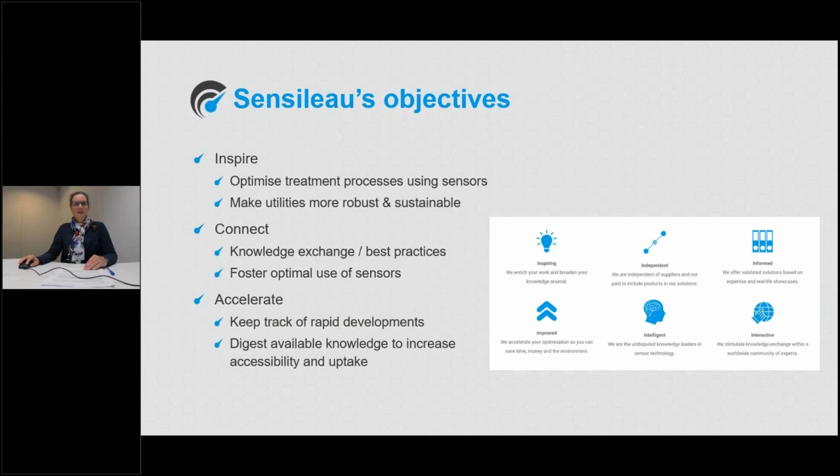We connect water experts from all over the globe to exchange knowledge and develop the best practices in order to foster the use of sensor technologies in the water industry. We keep track of the many rapid developments in the digital transformation of the water industry and thus accelerate the uptake of innovative technologies and monitoring strategies by collecting all available knowledge on this subject and converting it into accessible, readily available information. And there is a lot to digest.

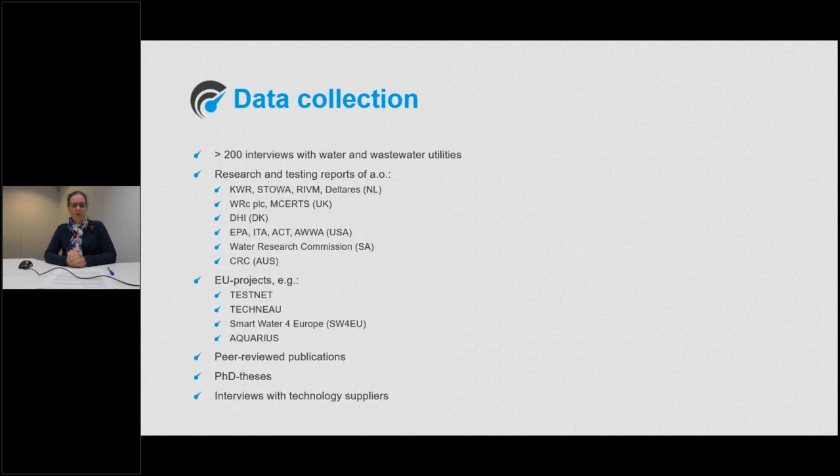So far, we have conducted over 200 interviews with water and wastewater utilities to ask them about their experience with sensor technologies in the field. We've worked our way through hundreds of research and testing reports and keep track of the latest research and developments through grant programs, peer-reviewed publications, and PhD theses. In addition, we regularly conduct interviews with technology suppliers to find out about new technologies entering the market.

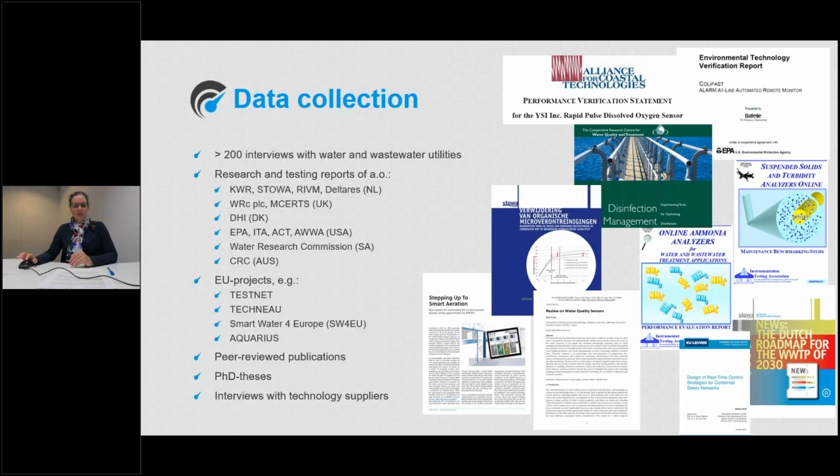Next, we convert all this information into various products, such as our sensor database, webinars, podcasts, workshops, calculation tools, and soon also e-learning modules. All our products have one thing in common. They are designed to provide you with the best possible information in as little time as possible, only a few clicks away. And today we discuss our Wat-IF calculation tool.

This tool aims to translate the results of pilot tests to individual wastewater treatment plants. Results obtained at one treatment plant are not always easily converted to another, as the successful implementation of monitoring and treatment technologies is often dependent on the local conditions and the layout of the plant. Wat-IF helps to determine the potential gains and benefits when implementing the pilot technology at your own wastewater treatment plant. The outcomes of the tool support the development of a business case for the implementation of innovative treatment technologies and new monitoring concepts based on the latest available knowledge and insights.

Wastewater treatment plants are increasingly required to address the removal of various types of micropollutants, such as pharmaceuticals and pesticides, to improve the quality of the receiving waters and to increase the possibilities for water reuse. However, implementing additional treatment steps to this end requires considerable investments and often increases operational costs, not least because of an increased energy consumption.

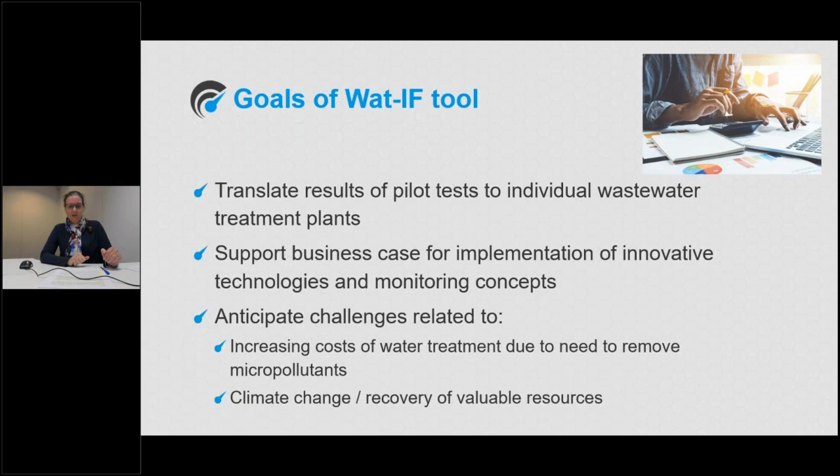With water rates already under significant strain and increasing pressure from society to reduce the overall carbon footprint of the water sector to help combat climate change, water utilities have little space to maneuver and need to be creative in order to meet all demands. The Wat-IF tool aims to support water managers facing these challenges. So, without further ado, I suggest we move on quickly to the first part of Roozbeh's presentation on the development of the Wat-IF tool.

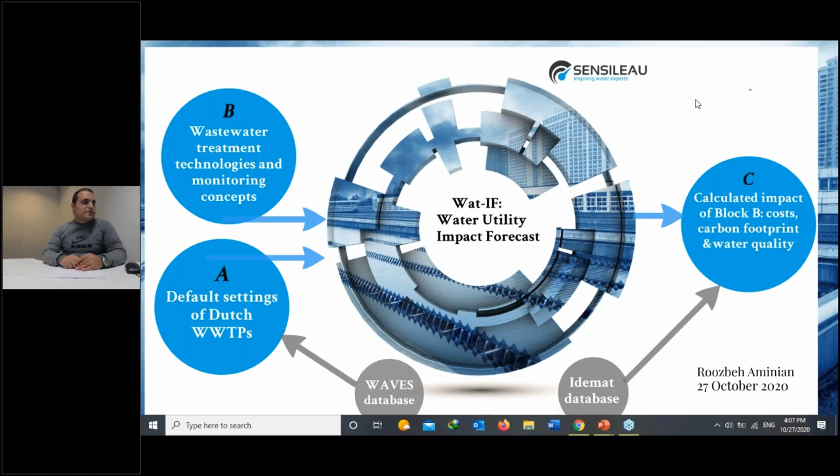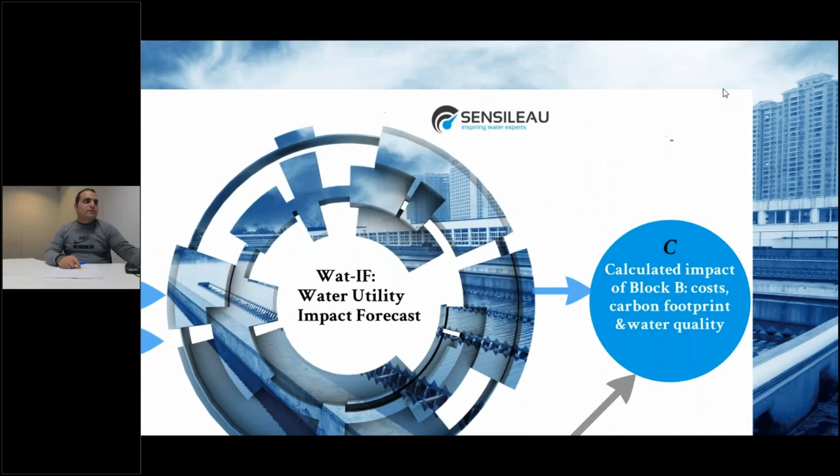I have a Master of Science in Chemical Engineering, Separation Processes. I'm a Master student in Water Management at University of Twente in the Netherlands. Currently, I'm researching at Sensileau. I'm working on my master thesis. I'm trying to combine my engineering and management knowledge by developing a decision support tool, in cooperation with Dr. Corinne Carpentier.

Wat-IF, Water Utility Impact Forecast, a decision support tool for water managers at wastewater treatment plants. This tool is going to help water managers at wastewater treatment plants in making a decision to implement new technologies and monitoring concepts by considering costs, carbon footprint, and water quality.

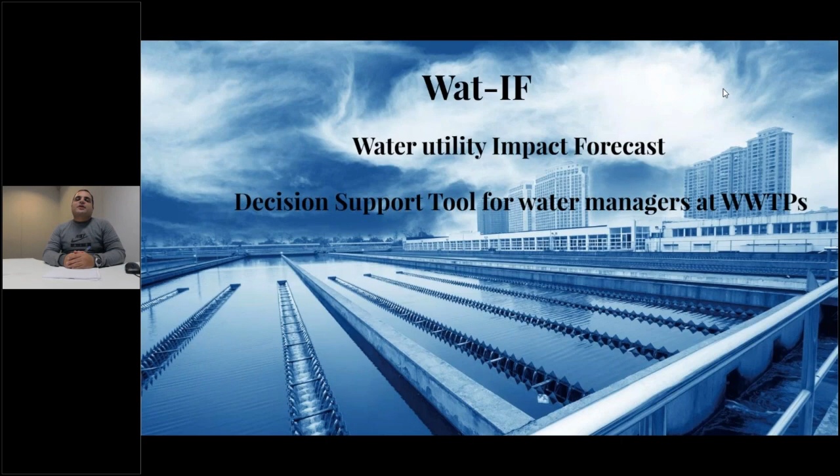As you can see in the overview of our model, Wat-IF is comprised of 3 main blocks and 2 databases. Block A is about the default settings of wastewater treatment plants. Of course, it's for Dutch wastewater treatment plants because we are working on wastewater treatment plants in the Netherlands. However, it can be easily converted into a version for any other country. And also the WAVES database, which was used to build the default setting for wastewater treatment plants in the Netherlands. We use the realistic data and information of the WAVES database.

The second block, block B, is wastewater treatment technologies and monitoring concepts. Those are the input block for our Wat-IF model. And block C is about the calculated impact of implemented technologies and monitoring concepts in terms of costs, carbon footprints, and water quality. And it's very important to note that this block uses the Idemat database in order to calculate the carbon footprint of implemented technologies and monitoring concepts.

Firstly, I'm going to start with the first block, block A, default settings of Dutch wastewater treatment plants. First of all, why default settings? In order to run the model, we need the exact information on the wastewater treatment plant. However, it is not always possible to use exact information for wastewater treatment plants, so we can use our default settings in order to run the model.

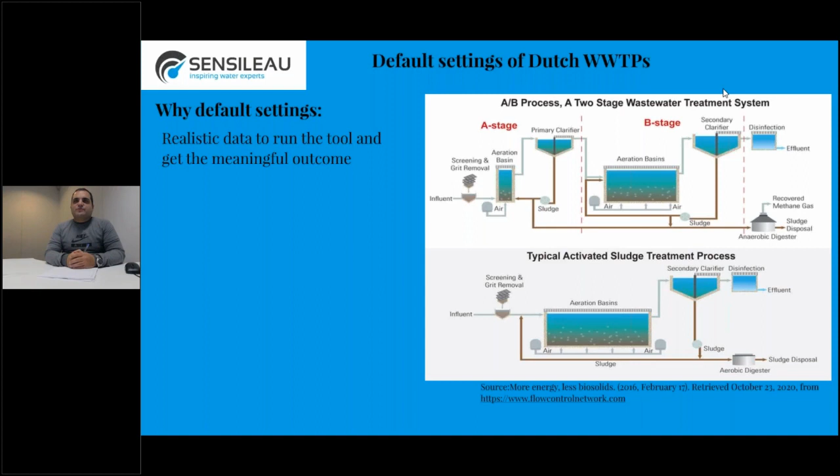But it is very important to note that realistic data need to be entered into the model to run the model and get a meaningful outcome. That's why we used realistic information and data of the WAVES database, which I'm going to elaborate on, to build the default settings.

But what are default settings? Default settings were built based on the main characteristics of wastewater treatment plants, the characteristics which define wastewater treatment processes, and which are going to be changed by the implementation of new technologies and monitoring concepts. Those characteristics are water quality parameters, size, wastewater treatment steps, and also energy consumption and costs associated with size and wastewater treatment step.

We considered nitrogen, phosphorus, COD, and BOD as parameters in terms of water quality. There is a wide range of micropollutants to be considered, but it's very difficult to measure all individual parameters in terms of micropollutants. And I would say nitrogen and phosphorus are very important because of eutrophication and their toxic effects on the ecosystem.

And COD and BOD are highly important because they are used to design the kinetic biological processes and also simulate the wastewater treatment processes. For example, BOD is used to determine the size of a trickling filter, and it is also used to determine the size of an activated sludge unit.

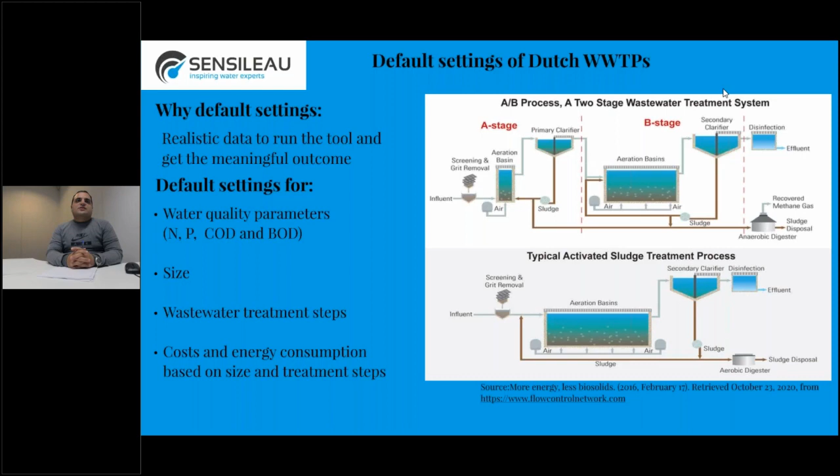So these are the default settings of Dutch wastewater treatment plants, which can be used to run the model if we don't have exact information on wastewater treatment plants.

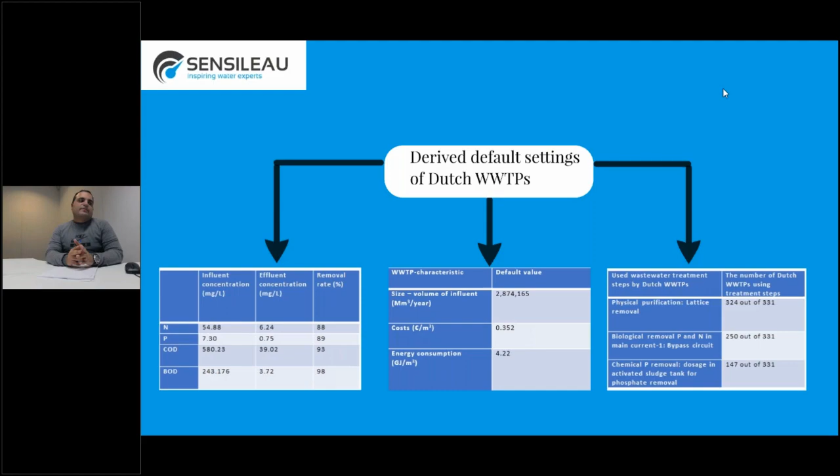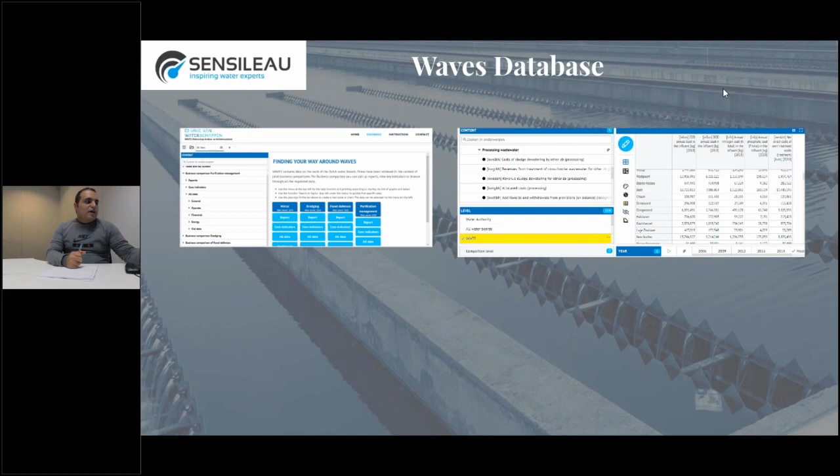But these default settings have been built based on the WAVES database. The WAVES database is a huge database containing different kinds of information and data. As you can see on the left side of the picture, different data: operational information, financial, energy, in terms of purification management, flood defenses, dredging, and etc.

Fortunately, this information is available for each wastewater treatment plant in the Netherlands. As you can see on the right side of the picture, COD, BOD, effluent, nitrogen, phosphorus, costs, energy consumption per cubic meter, everything regarding wastewater treatment plants is available, which can be used for building default settings for wastewater treatment plants.

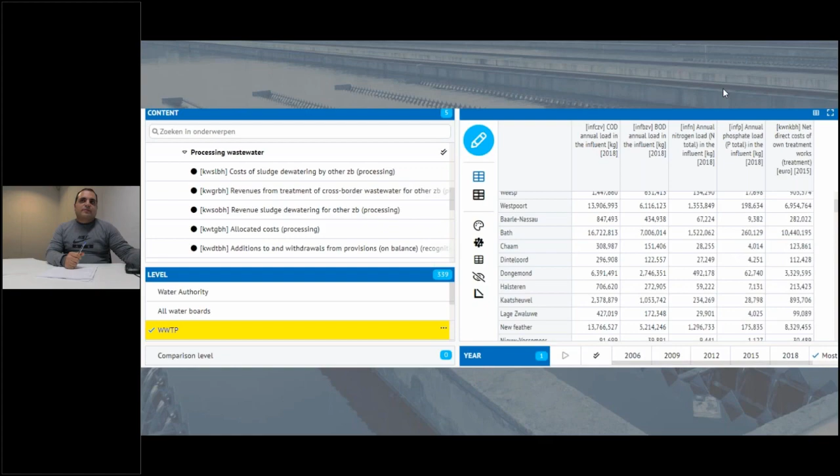I talked about the first block, which was the default setting and also the WAVES database, which was used to determine the default setting of wastewater treatment plants in the Netherlands. The second block is wastewater treatment technologies and monitoring concept. There are a lot of treatment technologies and monitoring concepts, but STOWA, which is a research institute in the Netherlands, is quite well known.

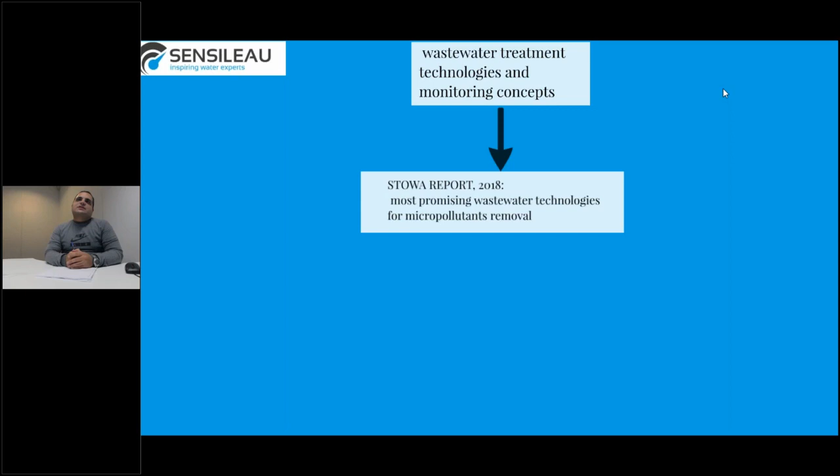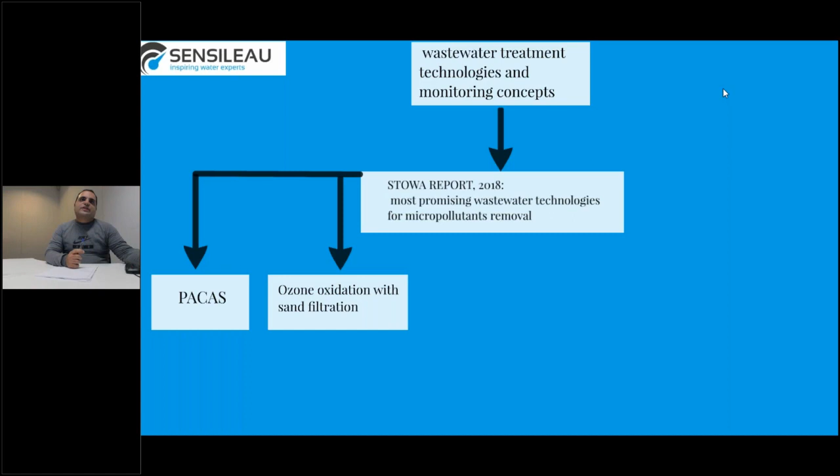They have been trying to develop and implement the best treatment technologies and monitoring concept, specifically in terms of micropollutant removal. They have been carrying out a lot of research. They came to a conclusion in the report of 2018. The most promising wastewater technologies for micropollutant removal are PACAS, powdered activated carbon and activated sludge, ozone oxidation with sand filtration, GAC, granular activated carbon, and UV hydrogen peroxide oxidation.

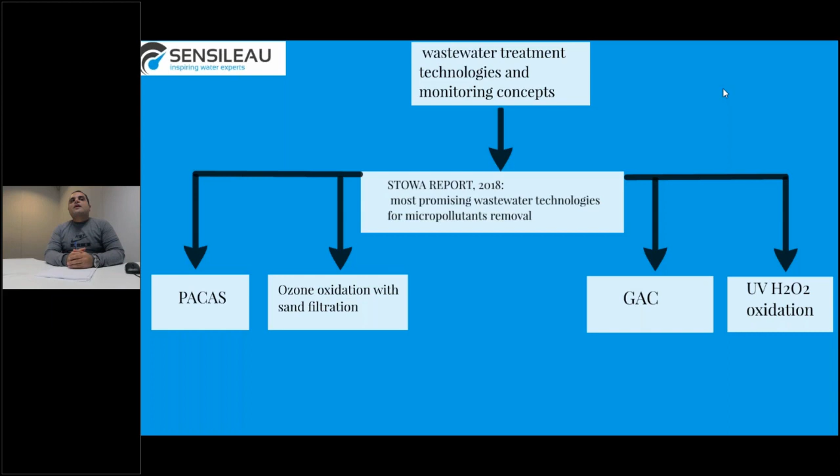We analyzed those technologies, we studied them. We conducted interviews with the experts involved in the implementation of these technologies at Dutch wastewater treatment plants. We came to the conclusion the best technology out of 4 technologies is PACAS. Powdered activated carbon goes into the activated sludge system. Actually, PAC is directly dosed into the aeration tank. Consequently, this is the combination of biodegradation and adsorption. Therefore, the removal efficiency of micropollutants is going to be increased considerably.

The energy consumption of this technology was 150 gigajoule per year, which is quite low in comparison with the other technologies. The carbon footprint of PACAS was 116 grams CO2 per cubic meter, which is quite high in comparison with the other technologies. The reason is PAC is considered a fossil product. That's why it's quite high. But I would say there are some developments in order to replace PAC with renewable materials to reduce the carbon footprint. If it happens, the carbon footprint of this technology is going to be decreased.

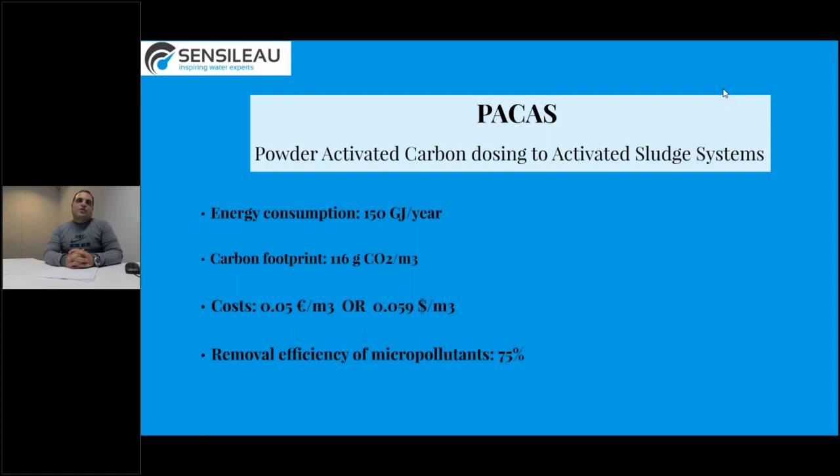And the cost of the implementation of this technology was 0.05 euro per cubic meter and $0.059 per cubic meter, which is quite reasonable in comparison with those technologies. And the removal efficiency of micropollutants by PACAS, first of all, is 60% when they use 10 milligram per liter PAC dosage, but when they increased the carbon dosage to 25 milligram per liter, they observed the removal efficiency increased to 75%, which is quite promising for this technology.

But in terms of monitoring concept, so far one of the best monitoring concepts is APC, Advanced Process Control, which is going to stabilize the treatment process, and is going to reduce energy consumption and costs. At the moment, I would like to invite Dr. Leo Carswell to elaborate on advanced process control.

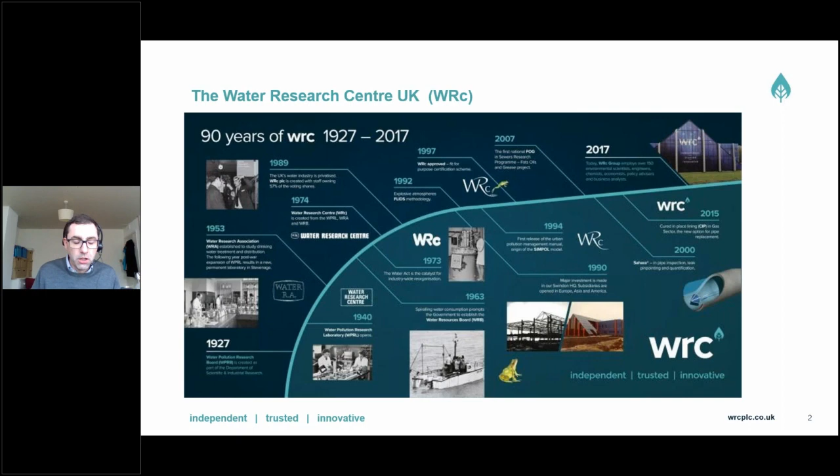So I work for an organisation called the Water Research Centre in the UK, WRC. I don't want to say very much about this organisation, but it has a very long history, and we've been working with the water sector for many years, well over 90 years. And sensors and instrumentation is my background, but a lot of work in recent years on process control and wastewater process control and the use of sensors. So I'm going to talk about some of the experience that I have through UK projects.

So maybe a good place to start is really talking about what advanced process control, or APC, really is. In terms of a term, it's really just a broad term for the use of technologies and techniques for optimizing a process or a control system. So really moving beyond a very basic control system to a more advanced system. And in terms of the concept we're talking about here today, we're talking about wastewater treatment. So I'm going to focus in on the activated sludge process, which is the process which has had most APC applied. Really, this is the main part of the treatment process, the most energy intensive part of the treatment process, where APC is often used.

And APC is used in that part of the process to control the dissolved oxygen level, the amount of aeration. So optimize the aeration to perform the treatment process as best as possible. So where you may previously have had a set point, maybe a 2 milligram, 1.5 milligram per litre dissolved oxygen set point, rather than just have a simple feedback control loop set at a single point, advanced process control allows you to do an awful lot more, and as was said earlier, optimize your process a lot better.

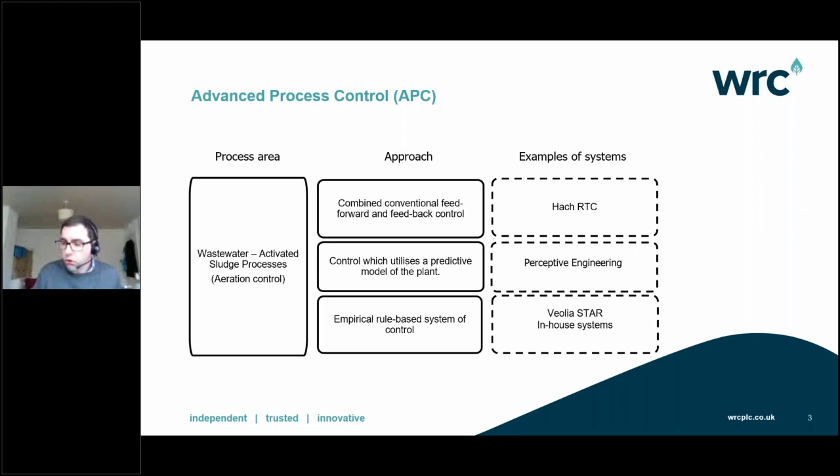The second one is a predictive model. So this is a learning predictive type model, what you might term a black box type approach. And I'll talk a bit about Perceptive Engineering. They're a UK company who have developed this technology for a wastewater treatment based approach, and there's several systems that use that type of approach. So I will talk about some of those examples in a bit, but first of all, I wanted to cover how advanced process control is used, because there are some clear distinctions, and I know about how it's used in the UK, so I'll talk a little bit about that.

But as was said earlier, it's all about reducing variability and getting better control of your process. And obviously, in the wastewater treatment process, you can't control what comes into your treatment plants, so you have a variable product. So getting any more control on it is an important aspect. In the UK, the current use is much about saving energy, saving carbon, saving cost, with managing the risk of variability as part of that. And it's about maintaining the effluent quality. So that's how it's used at the minute. It's very much about saving energy. So that's the red boxes at the top.

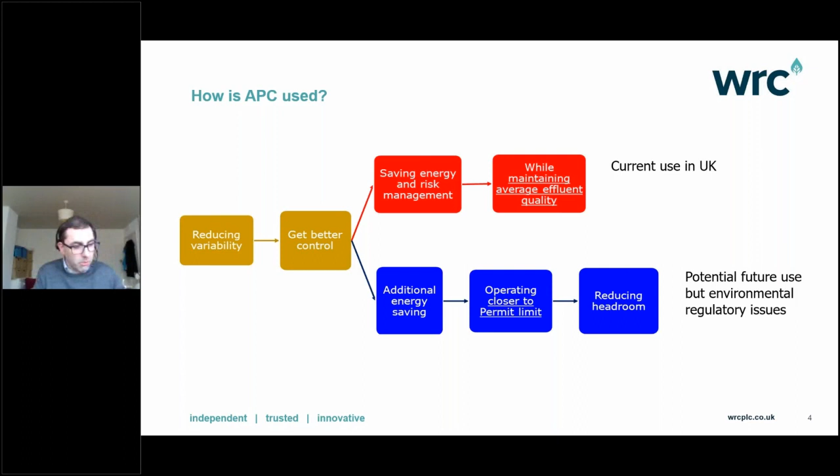The blue boxes at the bottom are the potential ways that you could use APC, but it's not used this way at the moment, at least not in the UK. So that's about additional energy savings through optimizing your process so that you can work much closer to your environmental permit limits. So essentially reduce any safety margin or headroom that you might have in the process. And that's not actually done at the minute, and there's several reasons for that, and I'll mention them a little bit later. So energy savings is really the driver for a lot of activated sludge control, and that's because aeration is an expensive process. The aerators, there's a lot of money, electricity spent producing that aeration. So this is the primary reason why people are doing activated sludge process control.

And I'll talk a bit about what the reality is in the field in terms of what people have been able to achieve. But they're the sorts of savings that you might expect. Although, as was said earlier, and really a lot of the whole point of today's talk is that each site is different. So really, it's very site specific, and it depends on the conditions and the site that you're dealing with. So that's a bit about energy saving.

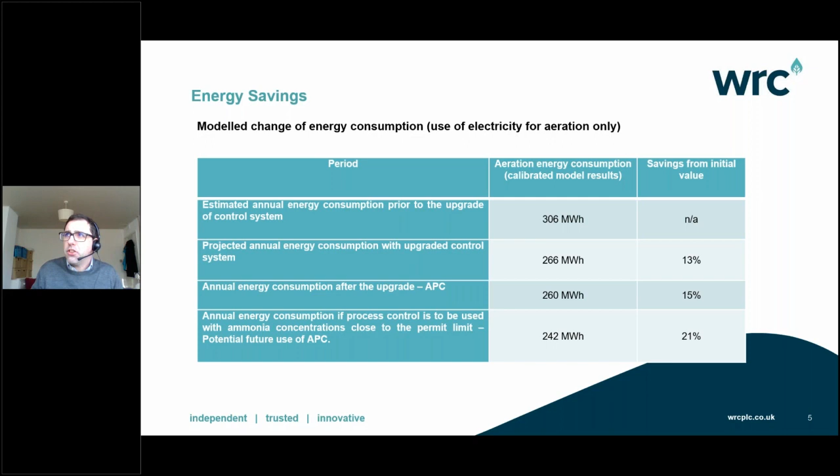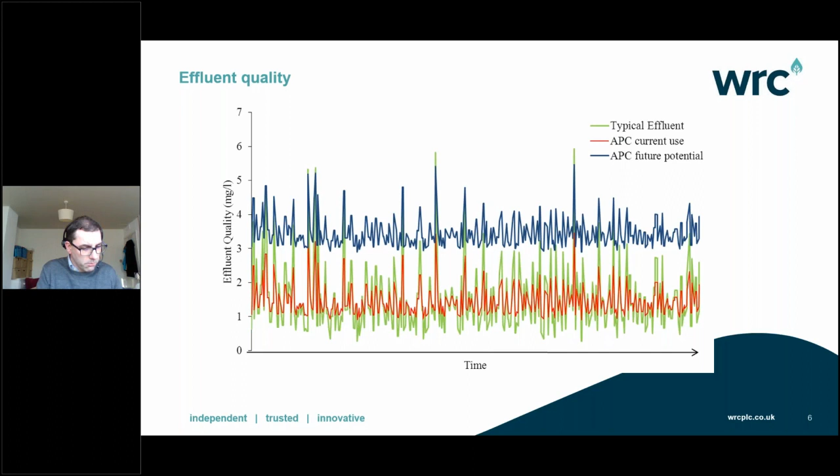You can look at this in a different way. You can look at this in terms of the distribution of the effluent quality from that plant, and this is where it becomes a bit more interesting. So the typical distribution of effluent quality from an activated sludge plant or wastewater treatment plants will have a long tail. So you'll have very few high concentration events. Your highest probabilities will be towards the low concentration. And that's the green plot.

The red plot shows the activated sludge advanced process control process, really tightening that distribution, controlling that distribution. So it's very tight around the mean, and the process is very well controlled. The future potential, the blue graph, is really just moving that to the right and saying you could operate your plant and discharge more material to the environment, save energy, save carbon.

But the reason that people aren't doing that, at least in the UK, is because that would mean more polluting load into the receiving waters. So the environmental regulator would probably say, sure, you're saving carbon through less energy, but you are polluting the receiving water more on an annual basis. So there's a balance between the

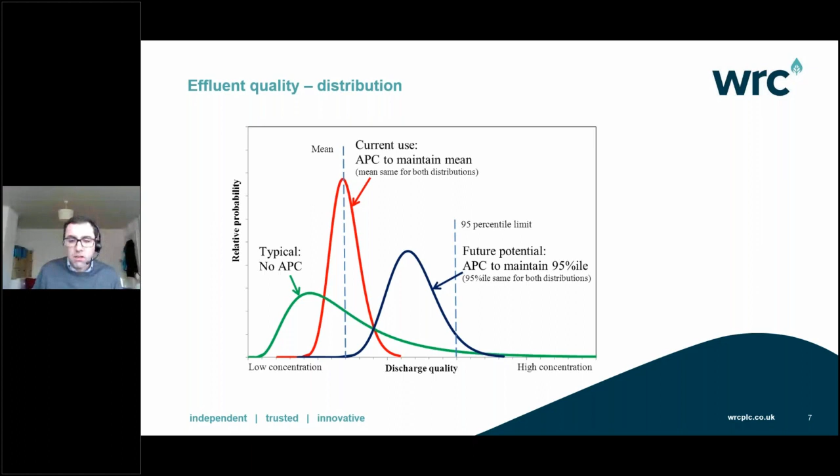about some of the different technologies. This is my area of interest a little bit more, and I'm not going to go into any detail specifically for activated sludge plants. So HACH are very well known for making sensors and instrumentation. They've added to that technology a process control system, which, as I said before, is based on this International Water Association pollution research and control model.

So an established model that's built into their algorithms, and it's based on feed forward and feedback control using DO, ammonia, nitrates, organic loads type sensors. So it's very well characterized. They've demonstrated quite significant savings. I think some of the literature talks about up to 30% savings over a range of different applications.

And at least in the UK, I think some of the largest wastewater activated sludge plants in the UK are running this system. So it's well used and well known and well characterized. The photographs are actually just HACH dissolved oxygen sensors. That is not actually the control system, but I'm not sure you can actually tell, because the control bit is essentially just software and electronics.

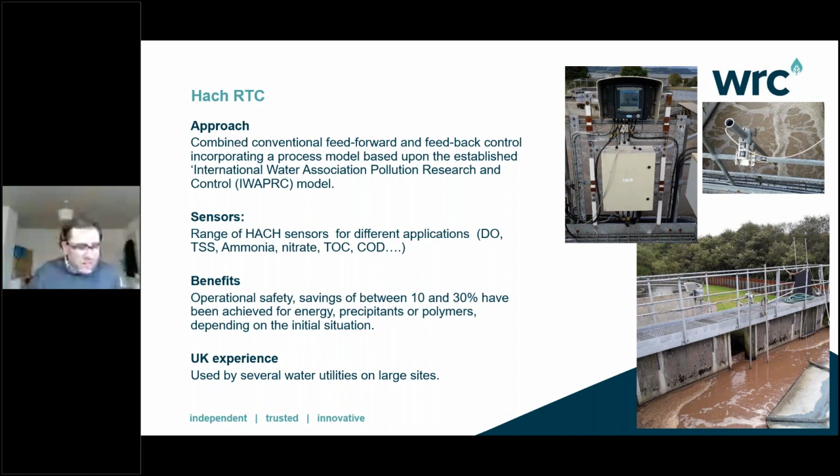The next system is a little bit different. So this is by a company called Perceptive Engineering. Perceptive Engineering are not a sensor manufacturer. They're actually a company based in the north of England, and the background is all about statistical process control, model predictive control, data visualization. And they've done a lot of work on manufacturing environments where you optimize the process.

Maybe this is a bit different, where you have a known product coming in and you want to produce a known product going out. Wastewater treatment is a little bit different, but they've been applying some of their technologies, and their technologies are all around using a predictive model. So it measures what's happening on the site, the inputs, and measures the outputs, and it learns over time the relationship between the inputs and the outputs.

So it's quite good when you've got a variable input and you might have different events, storm events, when equipment breaks, etc. So this has been used on several sites. Some really good benefits achieved. In the UK, it's been accepted and used by several utilities.

It is seen as this black box technology, so you don't really know what's happening inside the algorithm, inside the computer system that's operating it. So unlike the other processes where you can delve down into the algorithms and relate them to the fundamental wastewater treatment process, this is very much looking at a predictive model based on learning and relationships. So it's a little bit different, and that's seen as a challenge for some companies who want to know what's happening. The third approach is based on more empirical rule-based sort of systems.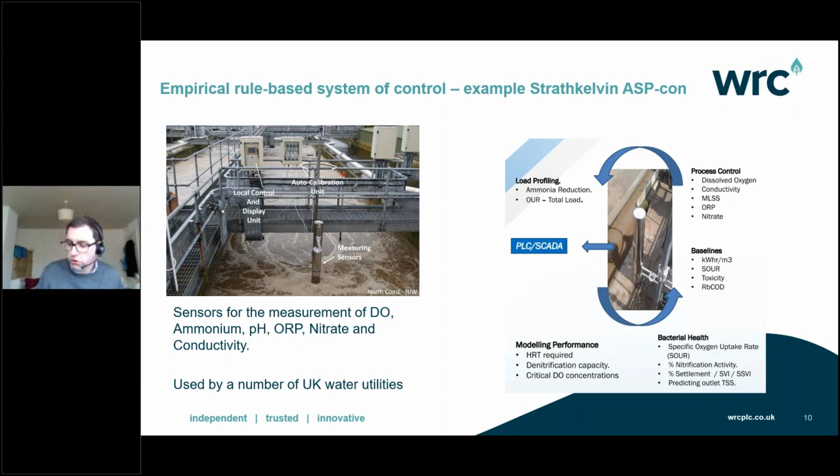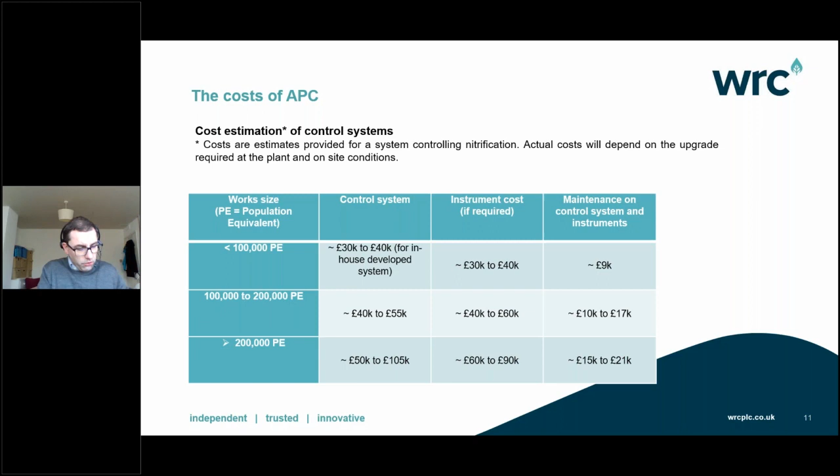So maintenance is required to keep the technology operating. We're talking about putting sensors into a really dirty environment, so keeping them clean is important. That's good. And then my final slide, I just really wanted to touch a little bit on some of the UK experience.

I think I said at the beginning, the use of APC has really been driven in the UK, at least, by energy and optimization teams with targets within the water utilities to reduce their energy consumption and their carbon use as well. So it's been driven by them rather than for compliance or discharge or permitting reasons. That's what the drive has really been, and that's been over the last 10 or so years.

There have been some really significant benefits achieved as a result of this technology. One of the messages you hear from the water utilities in the UK is that they often achieve the benefits within the first year or two years, and they had very good benefits. The challenge was to maintain those savings, so trying to get the system optimized over the long period can be a challenge because of the maintenance required and because the technology needs to be continually looked after. It's not a fit and forget technology.

These systems require accurate sensor measurements to be able to perform long term. I think all of the UK water companies have got these systems in place, and they will all invest in them more, and we'll see them being used at more sites, probably more smaller sites as well, because they tend to be focused on the largest sites at the moment. But we will see more on conventional activated sludge plants. We'll see more involved in things like P removal and sludge management as well. That will definitely happen over the next 5 or so years.

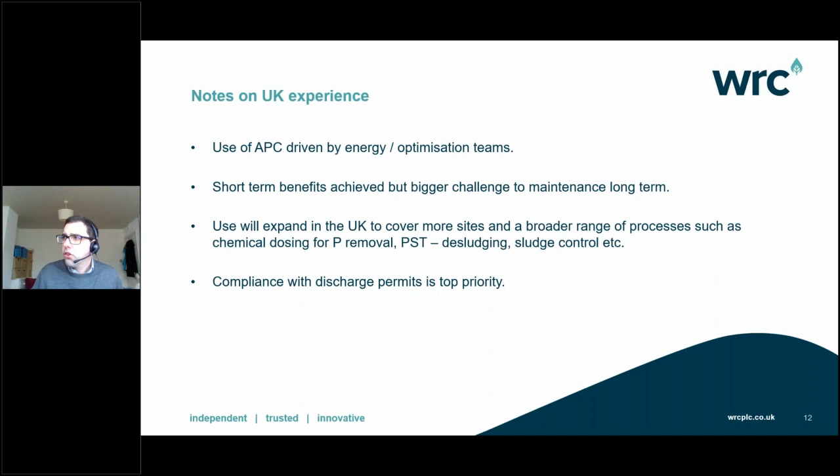So that's me. That was a very quick look at some advanced process control. There's obviously a lot more you can say about this, and I think a lot more that will be said about this within the project that's being presented, or the work being presented today. But hopefully that was a useful introduction and sets the scene a little bit to help the later presentation. I'm very happy to answer any questions if we have enough time.

At the moment we're done with block A and block B, the input and WAVES database, which are inputs for our model. So now I'm going to concentrate on block C, which is the outcome of the calculation of the Wat-IF model.

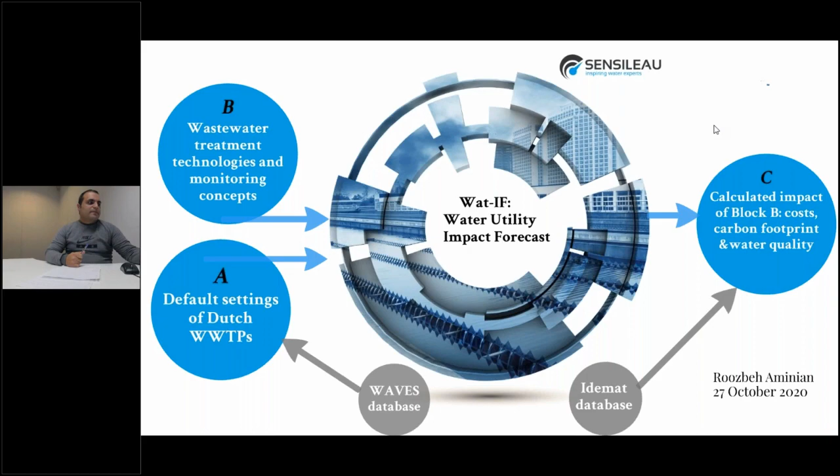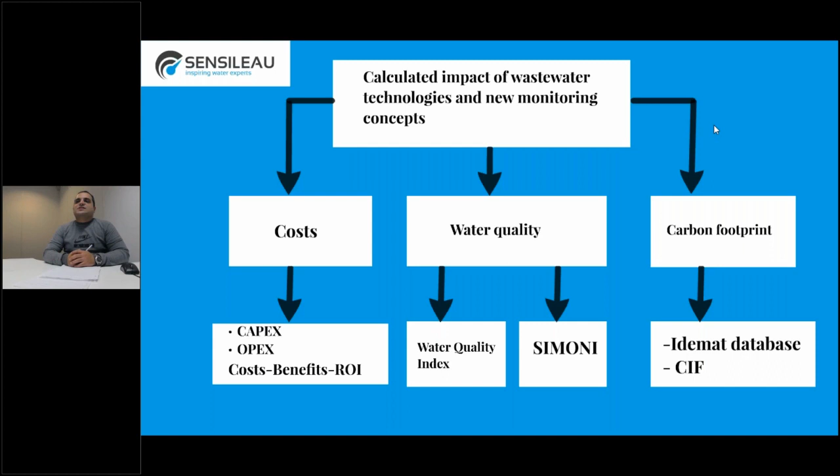Wat-IF is going to calculate the impact of wastewater treatment technologies and monitoring concepts in terms of costs, water quality, and carbon footprint. For costs, I'm going to talk about CAPEX and OPEX costs, benefit, and return on investment (ROI). For water quality, I'll discuss the water quality improvement quantification method, where Wat-IF calculates improvement numerically using two strategies: water quality index and SIMONI, which I'll elaborate on. Lastly, for carbon footprint, Wat-IF utilizes the Idemat database and CIF software, which I will also explain.

Firstly, I'll start with costs. There are OPEX and CAPEX costs, operating and investment costs. This information is available in reports of implemented treatment technologies or monitoring concepts, but water managers need to know how much money will be saved. That's why Wat-IF illustrates the cost of implemented technologies and monitoring concepts in a figure, so it's quite easy for water managers to look at and compare. Wat-IF also calculates ROI, return on investment, which is important because water managers need to know how long it takes for their investment to be recovered.

I put an example in terms of the implementation of APC. As you can see, the investment was $165,000, but APC stabilized effluent quality, so energy consumption was saved by 20%, and that's why $240,000 per year was saved. So ROI was estimated at 9 months, meaning after 9 months their investment would be recovered. This is the philosophy between benefit and cost that Wat-IF helps water managers with, so they can find out whether it's worth implementing a specific technology or monitoring concept or not.

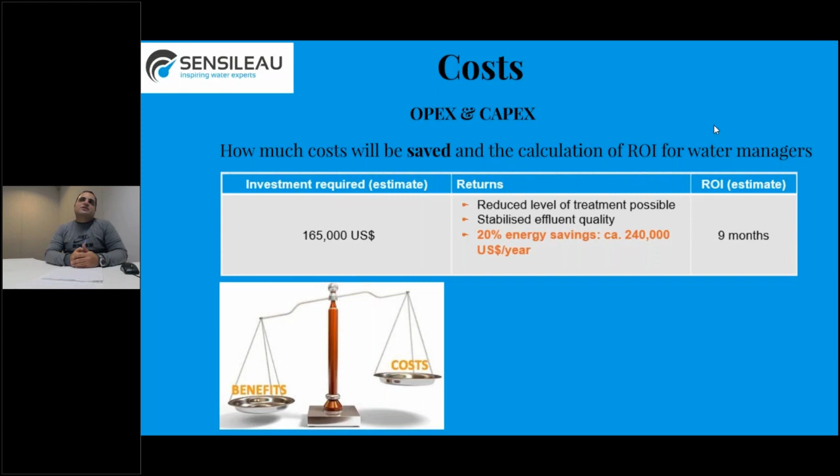In terms of water quality improvement, Wat-IF utilizes two strategies. The first one is water quality index. This strategy is used for macropollutants: nitrogen, phosphorus, COD, BOD, and etc.

If I want to clarify more about water quality index, I would like to compare this strategy with the Dow Jones stock market index, because the majority of people are familiar with it. For example, in the Dow Jones, you see trends, whether they are going up or down. This index doesn't tell you anything about the detail of companies, or how companies are performing financially. The only thing you see is the trend, whether it's going up or down.

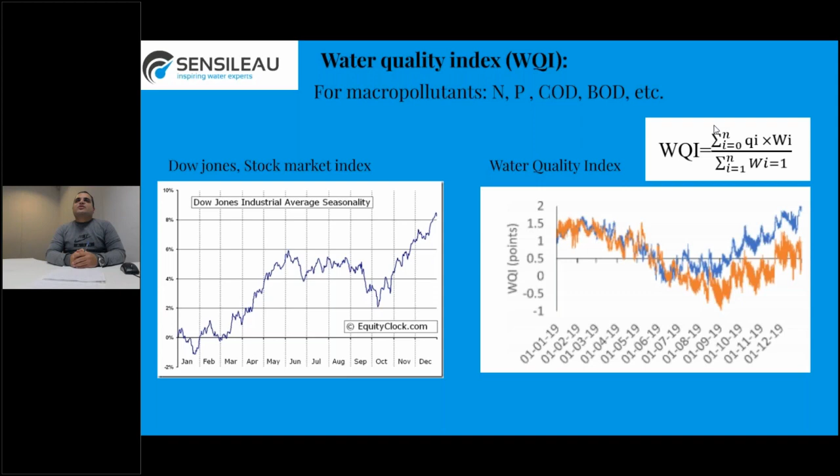The second strategy is SIMONI, Smart Integrated Monitoring. It is used for micropollutants, pesticides, pharmaceuticals, etc., which is a novel bioanalytical strategy. Wat-IF utilizes this strategy for micropollutants because it's impossible, and very, very expensive and time consuming, to measure individual parameters in terms of micropollutants. SIMONI is going to show you the effect of the group of substances, the group of pesticides and pharmaceuticals in your influent. This is effect-based and measures ecotoxicity.

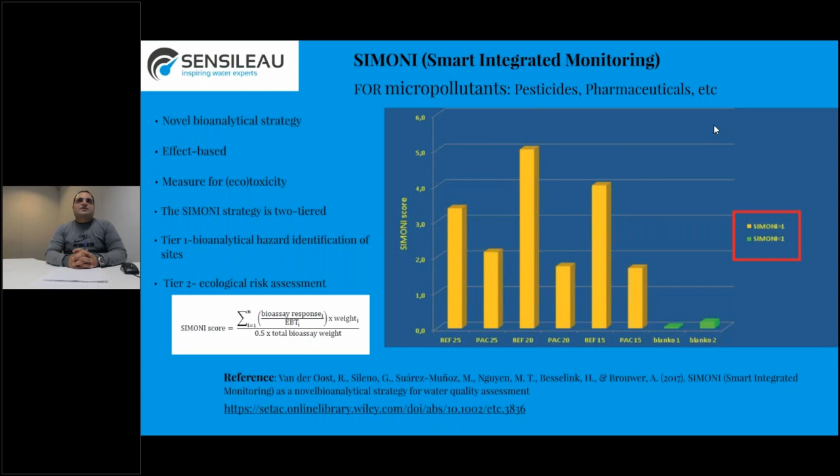And lastly, carbon footprint, the Idemat database, and climate impact forecast. Idemat is the Industrial Design and Engineering Materials database based on life cycle inventory. This database was built by Delft University of Technology in the Netherlands, based on tons of literature review, interviews, and research.

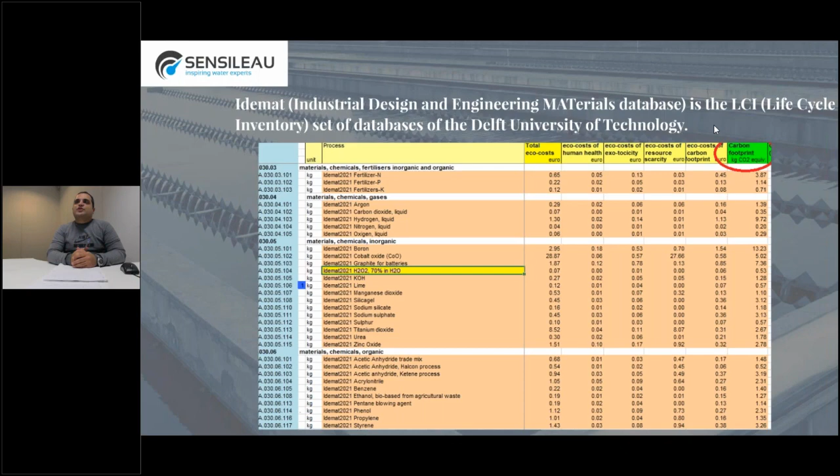This is quite a huge database containing the carbon footprint of different materials and substances, as you can see for example for chemicals, organic and inorganic materials. As I highlighted in yellow, you can see hydrogen peroxide, and on the right side of the picture, in the red circle, you can see the carbon footprint equivalent for hydrogen peroxide. But it's quite difficult to use this Idemat database, because it's a very big database.

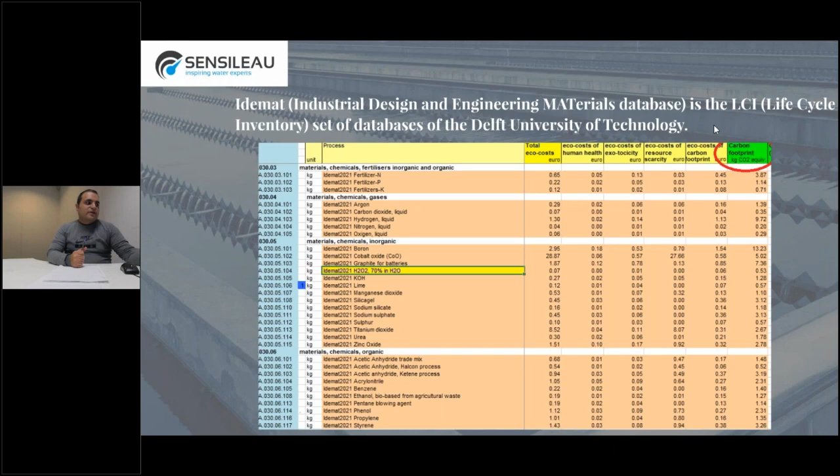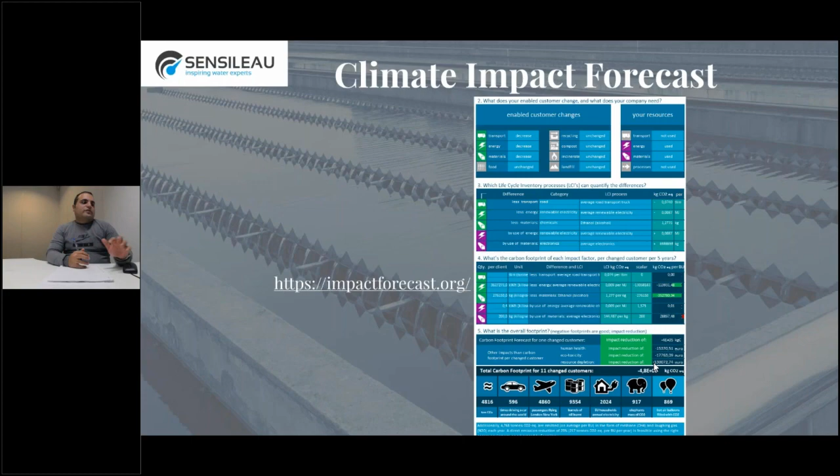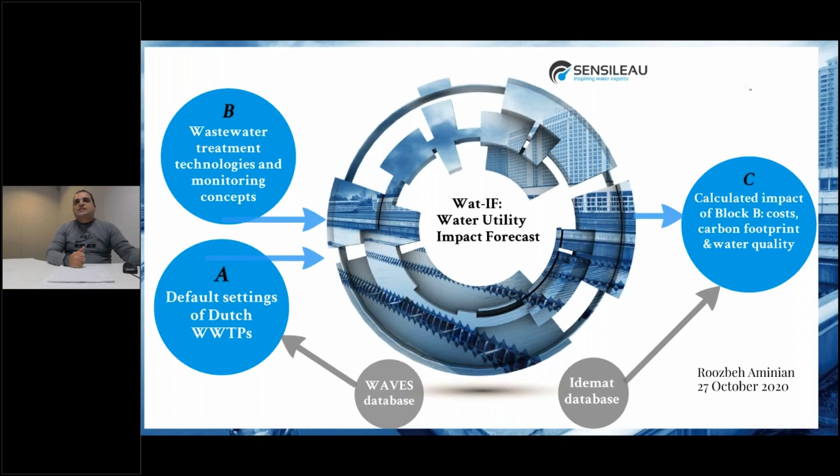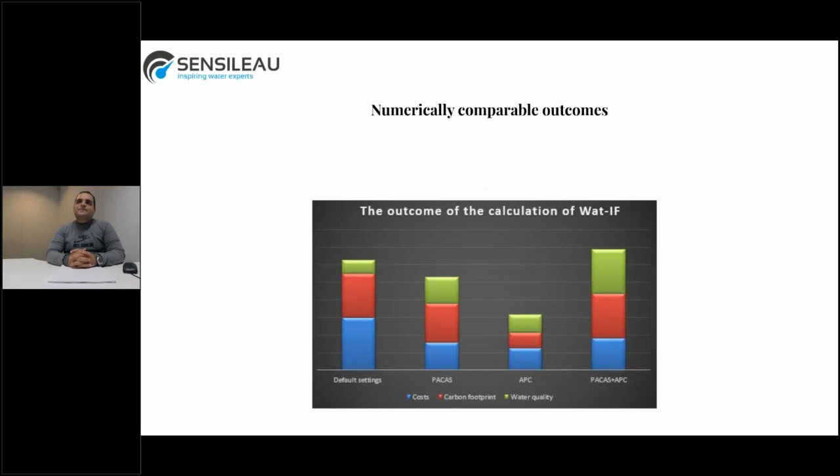So for conclusion, I would say your costs undoubtedly are going to be reduced because water managers don't have to pay water experts or consultancy companies. They just need to click on Wat-IF, and Wat-IF is going to calculate the outcome and graph so they can make a decision. And also water quality will be improved because you are aware of the status of your water quality and you can take the right action for your water quality in effluent. And also carbon footprint: you will be aware of the carbon footprint and energy consumption of the implemented technology or monitoring concept.

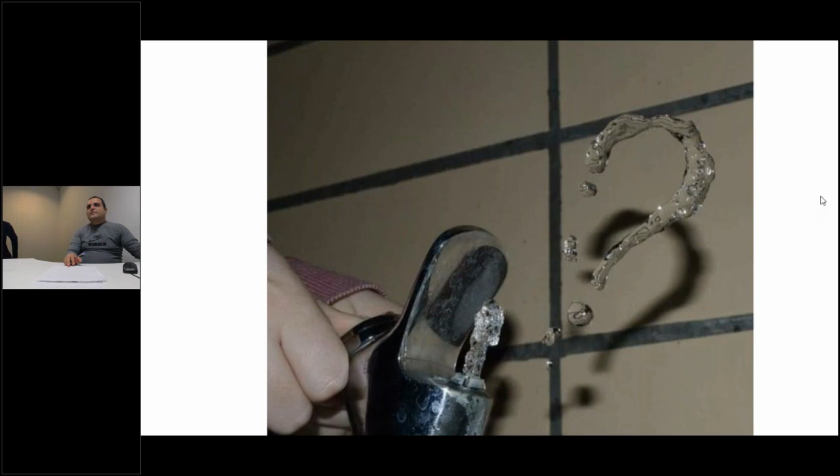Yeah, the first question is, this tool was built using data of Dutch wastewater treatment plants. Can it be converted to be implemented in other countries as well? Yeah, I would say it is possible to convert this model to be implemented in other countries. We use the WAVES database, which is a huge database specified for wastewater treatment plants in the Netherlands. So the only thing we're going to need is a database with realistic information and realistic data in terms of wastewater management to build the default settings for a specific model if we want to use it for another country or another purpose. We need to change the default setting because the default setting which we determined is based on wastewater treatment plants in the Netherlands.

Yeah, I'd like to add something to that. I think that in many cases there will be some parts at least of the wastewater treatment system that will be very similar to how we do things in the Netherlands; in that sense, we're not unique. A lot of wastewater treatment plants all over the world will, for example, use a biological treatment step. So we can use that information that can be converted, but I agree that we need specific data from other plants to see how they perform, to make sure that whatever we put in the model is indeed meaningful and based on realistic data.